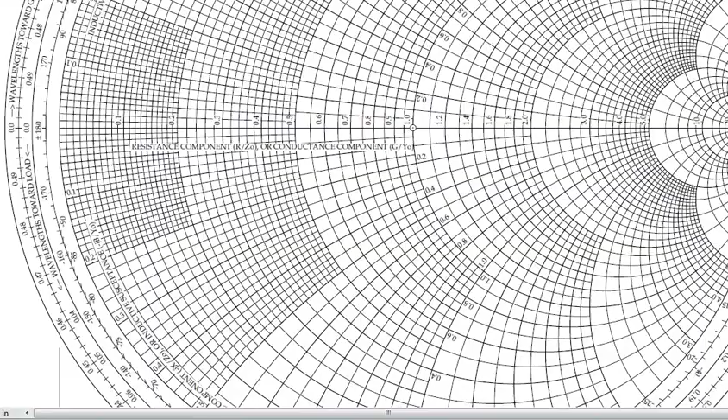Then you go with the bottom scale of the Smith chart. This is the standing wave ratio. We have the first scale for the standing wave ratio. When you are moving in this direction it is towards generator, when moving this direction it's towards load, and here we have the reflection coefficient, either E or I, current or voltage. We are going to use these two now. The remaining scales will be for some other applications.

On the left hand side we saw this, now moving to the right hand side by decreasing the size, here also the transmission coefficient exists, transmission coefficient, SWR, and here also some parameters are existing. For these parameters we are going to use all these scales. Here we are going to use the SWR scale and the reflection coefficient scale.

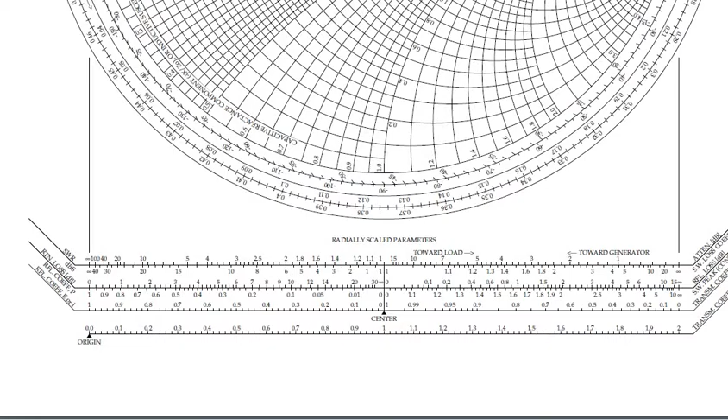Then we will move in the upward direction. In this case, as you already saw, these concentric circles we call resistive components. Concentric circles are resistive components. R by Z0 is a normalized value, or conductance components G by Y0. This is the resistance, the real part. We are going to refer to this axis as the resistive part, this real axis.

When you move to this, all these circles, like arcs, found above this reference line, we are going to use for the complex, meaning imaginary part. These are the positive values. When you come down, here all these are used for the negative values. Capacitance and inductance components are used here.

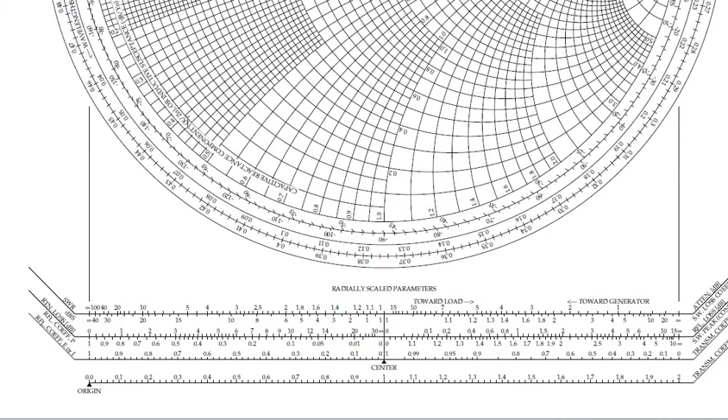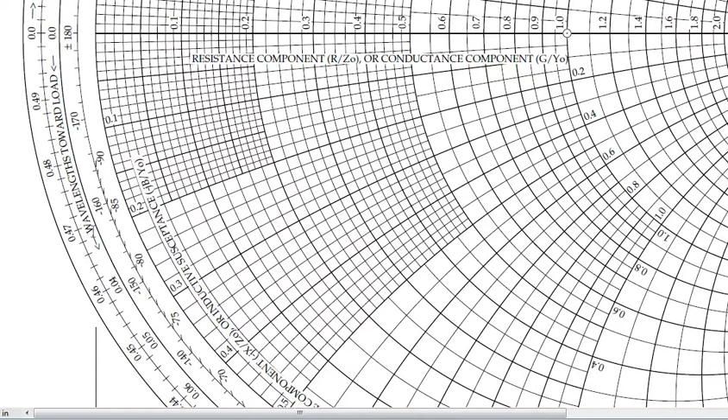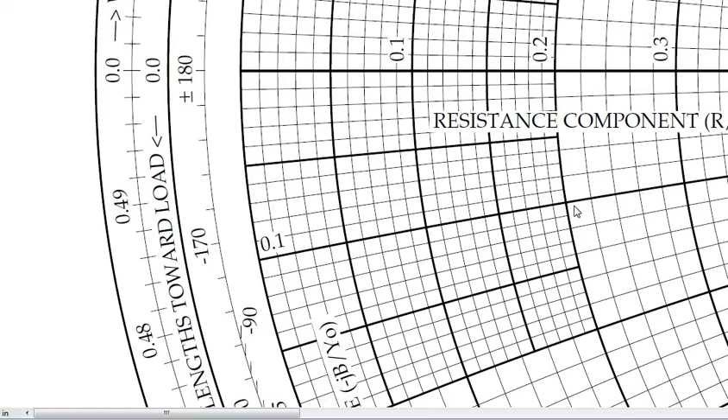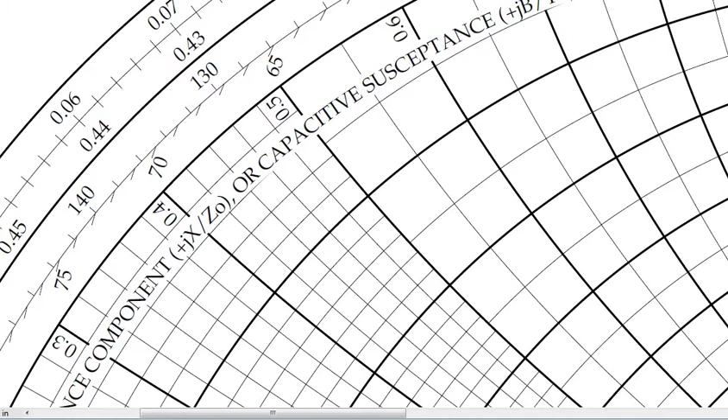And see, one more parameter on this: wavelength. Are you able to see these letters? See, wavelength towards load. This is wavelength towards load. In a similar fashion, when you move up, here, this one, so just having these.

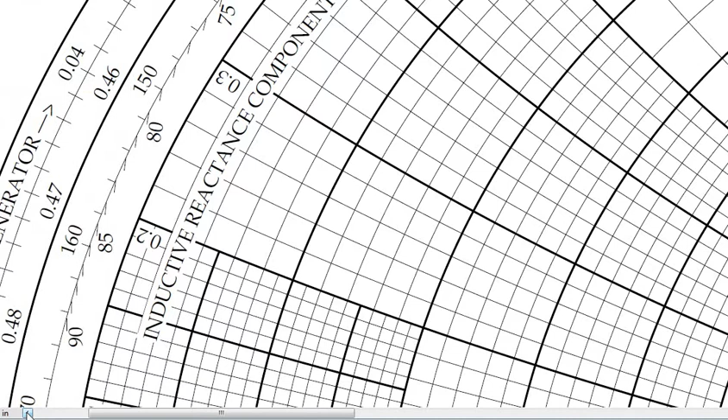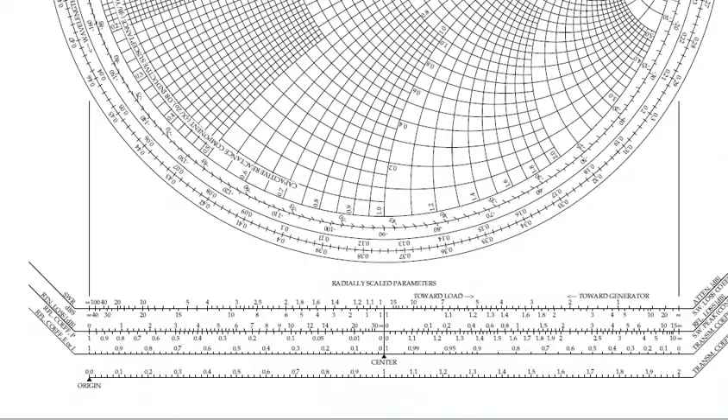See, towards generator. When you are moving in the upward direction it is towards generator, when moving downward it is towards load. This should be observable. This Smith chart is somewhat difficult to see in a PowerPoint presentation or on a laptop. Having this hard copy, look at it if possible. Otherwise, through this problem I will introduce the Smith chart to you. So this is the Smith chart.

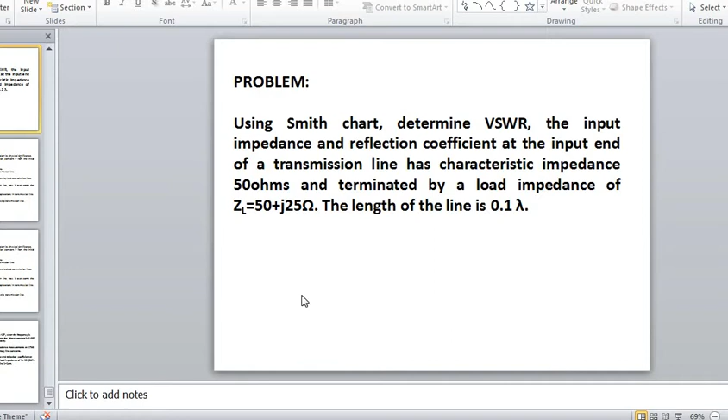Now we will go with the problem. What was the problem we saw? What is Z0 given? Z0 is given as 50 ohms. ZL is given as... what is the value of ZL for the given problem? 5 plus J 25. I think 50 I had given; you carry it as 5 plus J 25. Then we are going to have this as a normalized ZL.

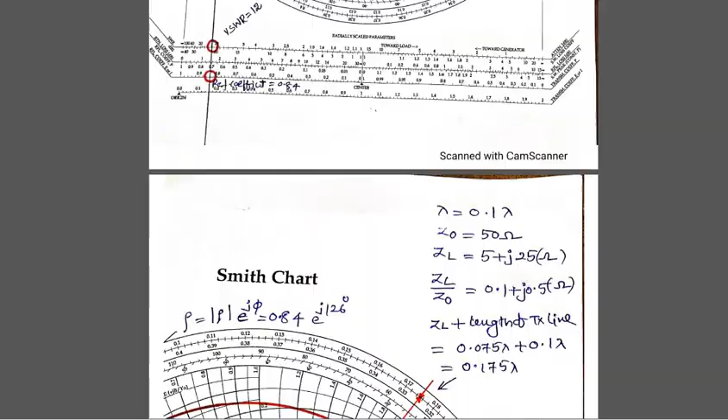Normalization means you are going to divide that by Z0. When you divide this entire thing by 50, the 5 gets cancelled, then 1 by 10 equals 0.1. Here 5 fives by 10 equals 0.5, we are going to get here. So ZL plus ZL up to this part, then we will come to the next point. See this. So what is the impedance given? Impedance in normalized form is given as ZL by Z0 equal to 0.1 plus J 0.5.

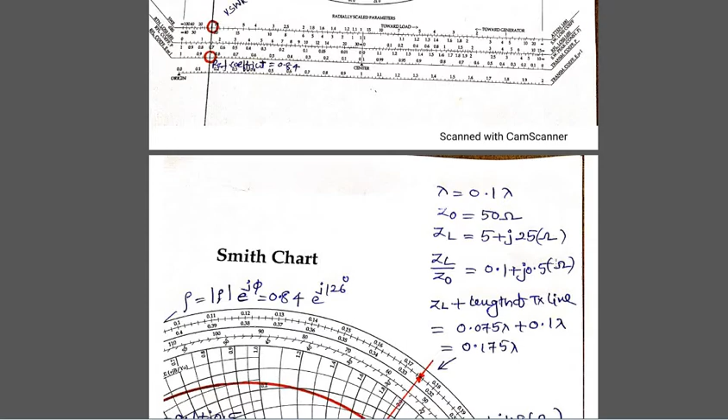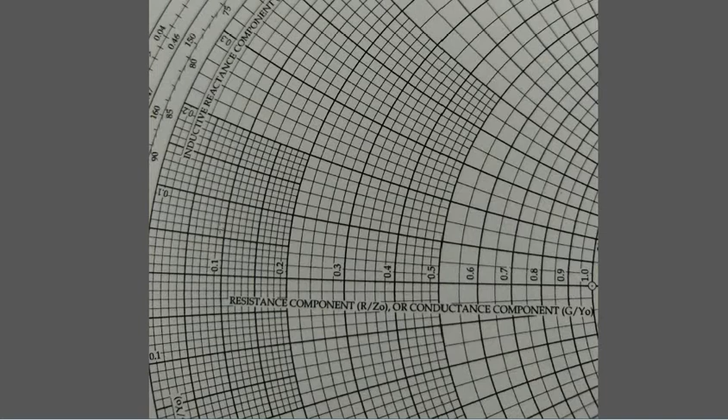0.1 plus J 0.5. So on the real axis, as you already came across, the x-axis is going to be convenient for us. The x-axis will give you the real axis, then those arcs like curves will give you the imaginary part. In this case 0.1, see this 0.1, this line will follow that 0.1, this line is going to follow 0.1, and this J is going to be 0.5, so this 0.1 real axis is going to coincide with this 0.5.

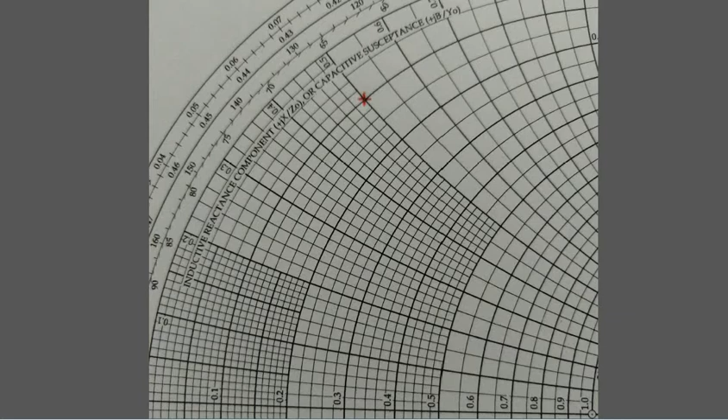So here we are marking this as the normalized load impedance, ZLN you can write. Then see this, it looks like this. What I have done: ZL equals 0.1 plus J 0.5. So this is the real axis, 0.1 circle coincides with this 0.5 imaginary axis. So we identified the load impedance on the Smith chart. First step finished.

Then we will go with this origin. Already we went through the 0.1 axis. From the center, 0.1 axis, from the center you are going to mark this, this is the center of, center 1, 0.2, 0.4 like this, 0.2, 0.4 like this. Here 1 to 1.2 we are going to have, 1 is the middle value. This is the center.

From the center to the point whatever we marked here as ZL equal to 0.1 plus J 0.5, a length is going to be considered. With that radius we are going to make one circle here, shown in red color. With this radius, the distance between the origin and the point marked here as normalized ZL, we are going to make an arc here.

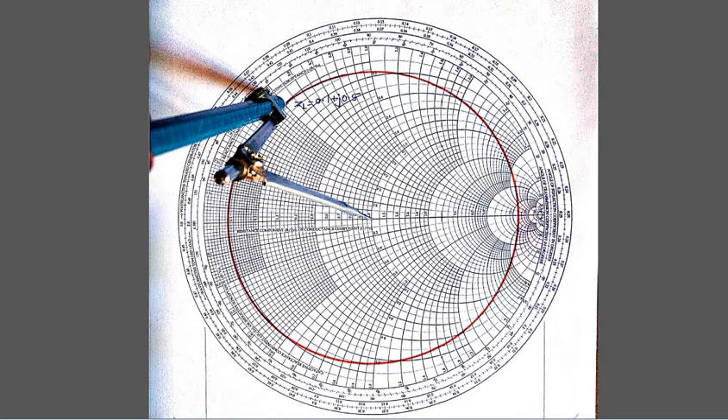That circle is nothing but the VSWR circle. We call this entire circle the VSWR circle. If you know the load impedance on the Smith chart, we can draw it, and the VSWR circle we had drawn.

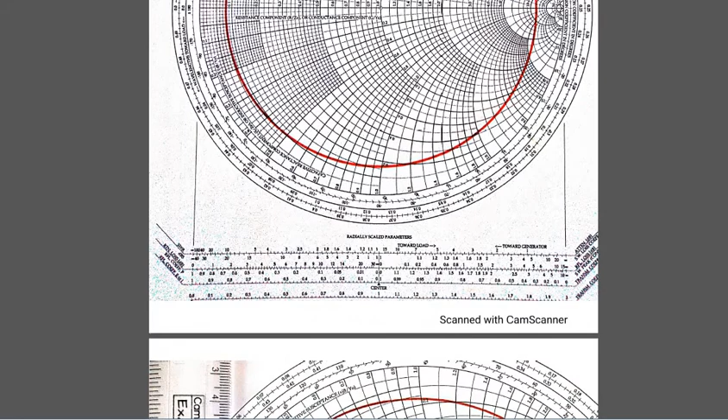See that this is the VSWR. With that VSWR, this line or arc is going to be extended. Already we have a scale at the bottom, and we are extending this tangent onto the scales.

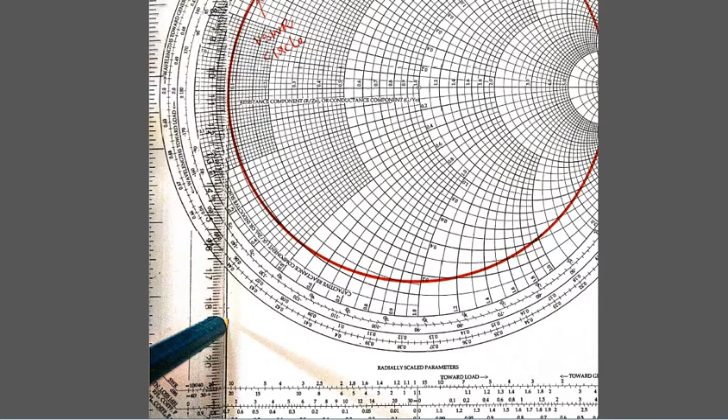This is the VSWR circle. By joining with a straight line, when I made a snap it was somewhat tilted, not more. Here I am using a scale, from this point to here I am going to join, and now I am going to find out this.

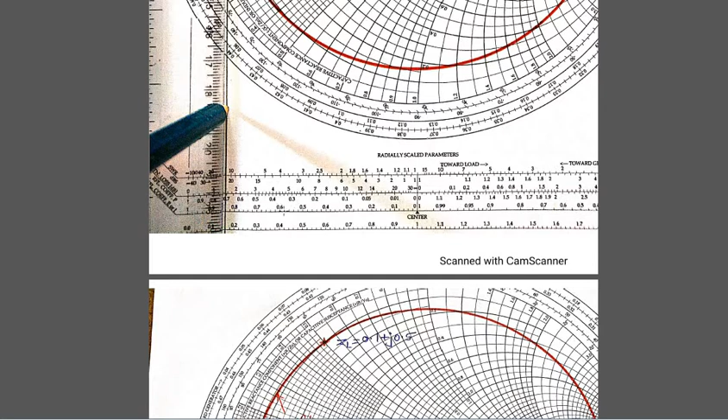This is SWR in dBs. The third scale is nothing but reflection coefficient. This one is going to be the reflection coefficient. I am going to mark those values. This is the line I had drawn here with a pencil. Then in the SWR, I am going to show it with a magnified scale next.

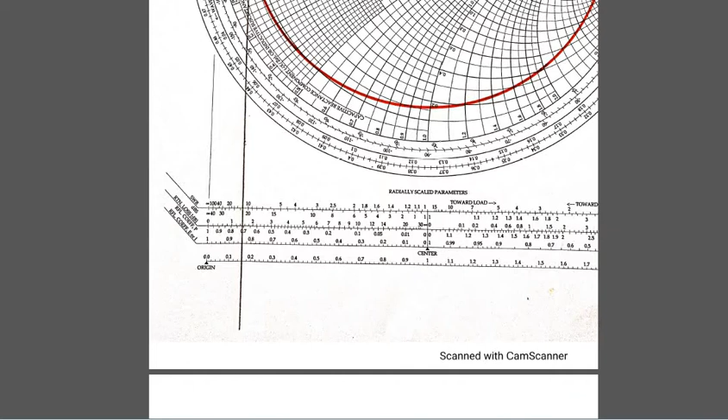I am going to point this out with a magnified scale. See, this is the magnified scale. From 10 to 20, my tangent is going to cross here. I am going to divide that into 5 parts: part 1, part 2, part 3, part 4, part 5.

So the distance between 10 to 20 was bisected into 5 parts. Each part of 10 is going to be divided into 5 parts, so each bisected part will be equal to 2. So here I am going to get it as 12.

In the similar way, for the reflection coefficient, this third line - the first line gives you SWR, the third line gives you reflection coefficient. Here this reflection coefficient is 0.8 to 0.9. The difference between these points, 0.8 to 0.9, will be equal to 0.1. That 0.1 is divided into 5 bisects: 1, 2, 3, 4 and 5.

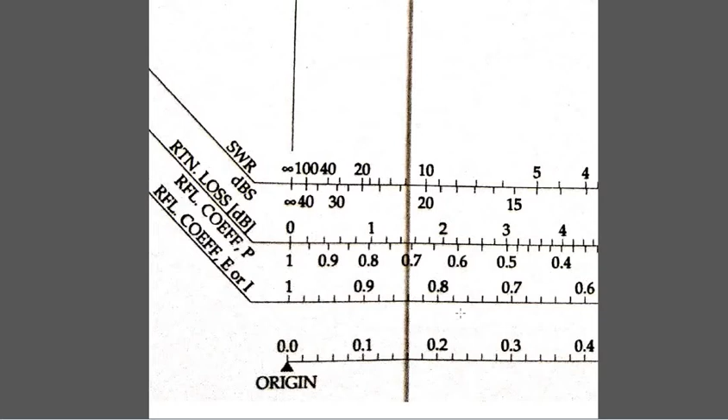Each one will become 0.02. Then from 0.8, it becomes 0.84. So SWR will become 12 and reflection coefficient will become 0.8 plus 0.02 plus 0.02, which is 0.84. I will show that there with a value.

So this is the scale. I am marking it as VSWR equal to 12, and the reflection coefficient at this point will be equal to 0.84.

So what we have done: first we marked ZL, the normalized ZL, on this Smith chart. After that I made a VSWR circle. That tangent was extended onto the scale. I found 2 parameters relevant to the transmission line: one is the VSWR, the second is the reflection coefficient.

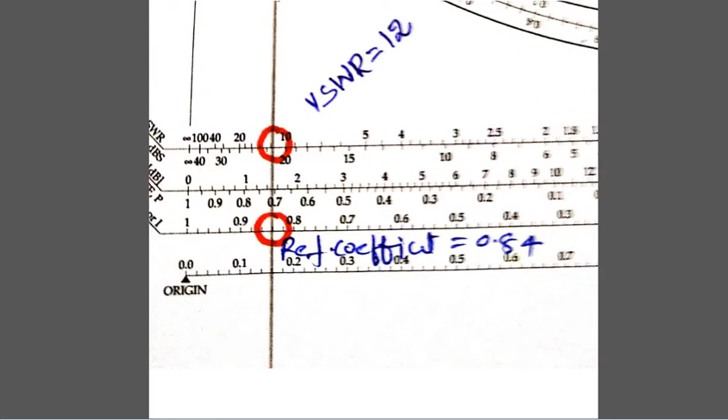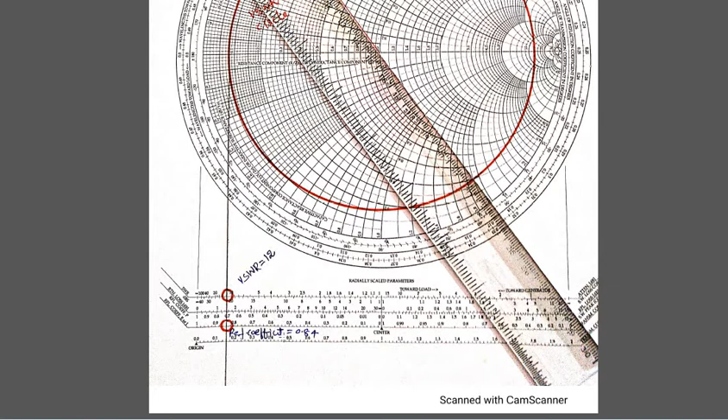Then our graph looks like this. See, this line extended, VSWR found, reflection coefficient found. After that we are going to make a straight line from the origin, passing through ZL and crossing these two.

What are the two? This one is going to be wavelength towards generator. The second one going to be angle, wavelength towards load, another one. Then this is going to be the angle, angle of reflection coefficient.

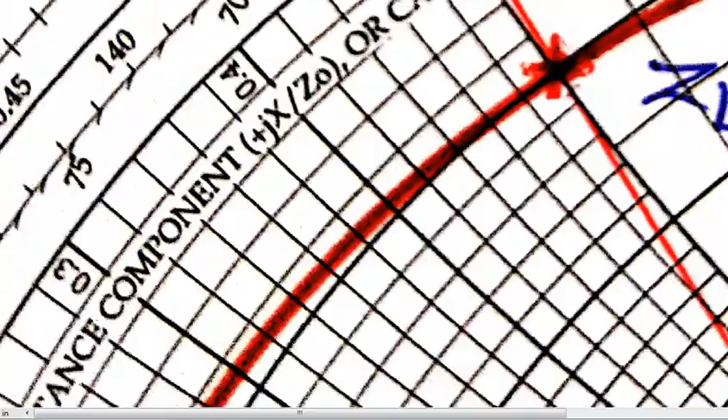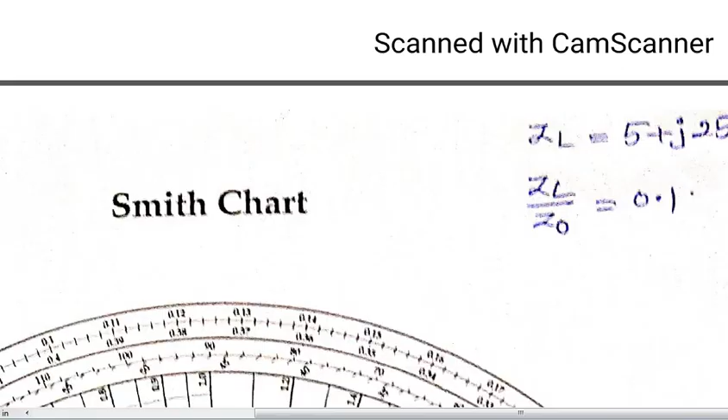See, here I will magnify one more time. I will magnify. Come to the right side part. It will give, see here.

See, angle of reflection coefficient in degrees, angle of transmission coefficient in degrees. Here we are interested to find the angle of reflection coefficient at the input side. So we have to draw a line joining from the origin through ZL, which is going to cut that reflection coefficient angle.

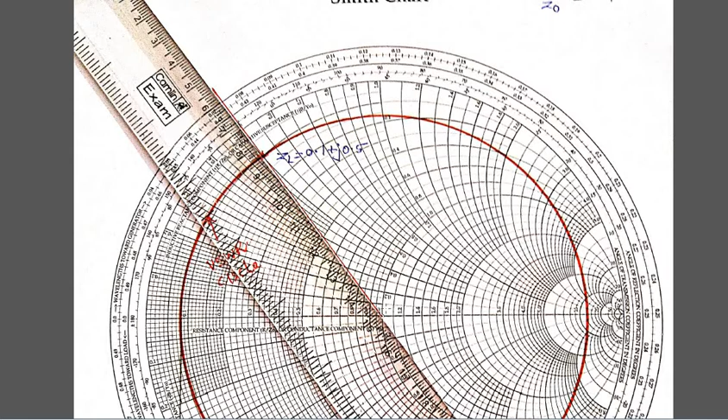Just now we found the reflection coefficient - what is it? Reflection coefficient equal to 0.84. Then we have to find out the angle of reflection coefficient. For that purpose we are drawing this straight line from this point to this point.

See here, this was cut at an angle between 120 and 130. This also is bisected into 5 parts. What is the difference existing between 120 and 130? 10 exists, 10 divided into 5 parts, each one will be 2. So 122, 124 and 126.

So angle of reflection is going to be 126. If you extend the same scale at this, it will cross that. Here this scale you are going to refer to. This is the wavelength at that ZL - what is the value here? From 0.07, and this also going to be divided into 5 parts.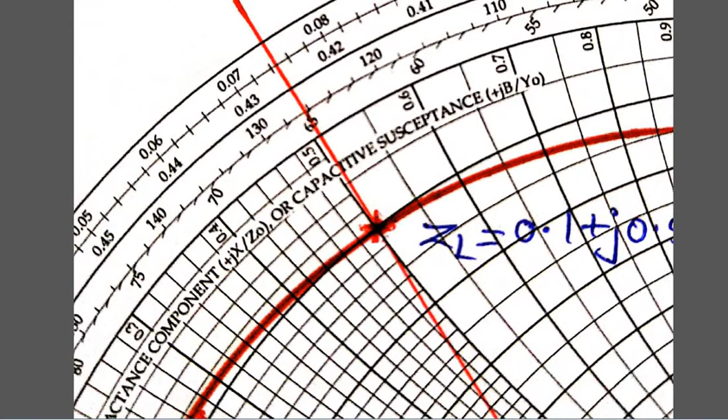Then we will move to the regular graph, which is clear for you. See that extended line from ZL onto the angle of reflection and wavelength. This is the wavelength, this is the angle of reflection. See those values.

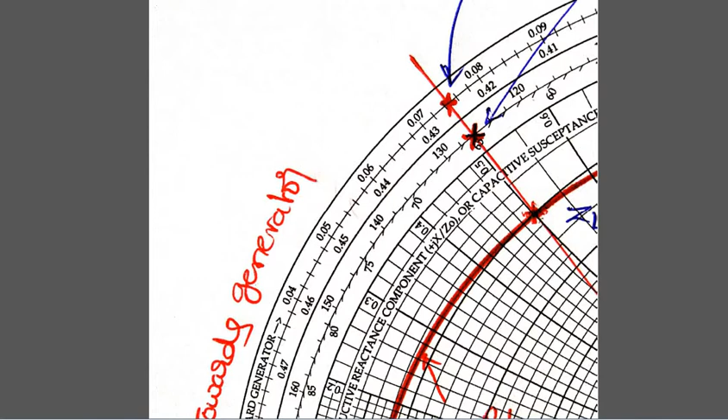Okay, so those values are not mentioned here. Can I reduce that size? That may not be mentioned. So you remember that this is the value of 0.075 lambda. This one is going to be 126 degrees.

Next we will mark those, then we are moving on the graph. We are moving on to the right side towards the generator. You know the characteristic impedance was given to you. You are moving towards the generator.

What is the length of wavelength transmission line given? 0.1 wavelength or 0.1 lambda. So that already existing lambda given as 0.1 lambda, Z0 equal 50 ohms, ZL equal to this, normalized this. Actual length will be added, ZL, normalized ZL plus length. What is the normalized ZL wavelength? Just now we observed

0.075 lambda plus 0.1 lambda, it will be equal to 0.175 lambda. 0.075 is existing on the left side, and by adding 0.1 length it became 0.175.

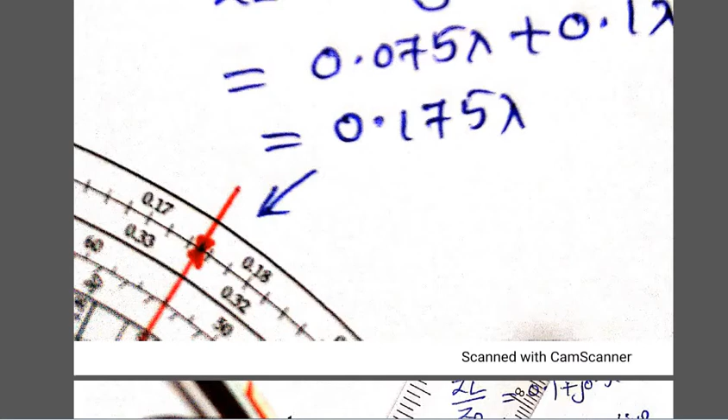See this scale, we are moving towards the right side, means towards the generator. So this point was marked 0.175, means 0.172, 174, 175. See this one, then from the left side to the right side you shifted. 0.075 lambda existing on the left side, added with 0.1 lambda, becomes 0.175 lambda. That was shifted, meaning from the load side towards the generator side you shifted.

That value of wavelength is given as 0.175 lambda. If you join this point to the center, that will cut the VSWR circle at Z in. This one is going to be ZL with a difference of 0.1 lambda.

You are going to reach to the Z in. So this was the scale you can see. So you are going to join that ZL point, wavelength angle, reflection coefficient you found. Now with that wavelength you are adding the transmission line length, you reach to the Z in wavelength. That Z in wavelength extended to the origin, you are going to get that Z in.

What is the Z in value? See this Z in, what is this arc indicates? This arc is relevant to the 0.4 real axis, and this point is going to cut, this reactance component will be equal to 1.9. I will show that in the next graph.

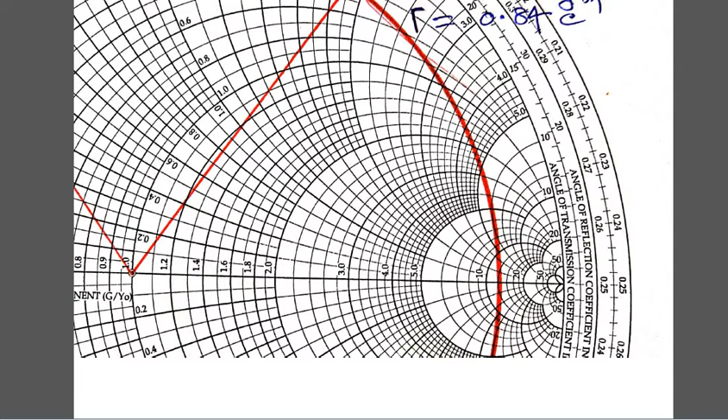So by this way we can calculate so many parameters about a transmission line. What are the parameters given? Lambda given for you, Z0 given for you, ZL given. From that we went through normalization. Then we drew a VSWR circle, and that tangent was extended onto the scale. We found that VSWR and reflection coefficient.

Then we went through that reflection coefficient, angle of ZL and wavelength of ZL, at what point ZL is existing. Then it was moved towards the generator. Then we found out that Z-in, reflection coefficient of Z-in we found. If you extend these lines we will get admittance.

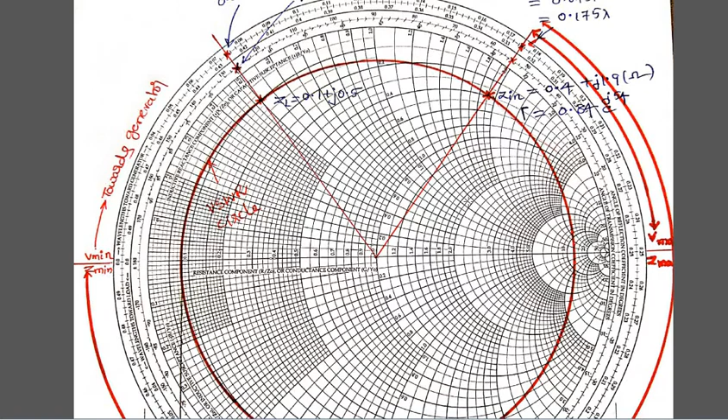Up to this, just a brief overview of how to use a Smith chart. Just a complete diagram you have to go with this. This is the diagram, not clear for you. Okay, see this. First what we have done, we marked this ZL. Then we drew the circle from the origin, VSWR circle, extended VSWR and reflection coefficient. The reflection coefficient angle and reflection coefficient wavelength found.

When you are moving towards the generator, you are interested in Z-in, so that you are moving. What is the length? You think this is the length of the transmission line, that will be added here to the existing point. You reach to that Z-in reflection coefficient and Z-in wavelength. Z-in wavelength extended onto the VSWR circle will give you Z-in.

If you extend these lines you will get it as admittance. If time permits we may go for further problems or numerical problems on the Smith chart. But if you have any doubts, if you are interested in a few more problems, you ask me.